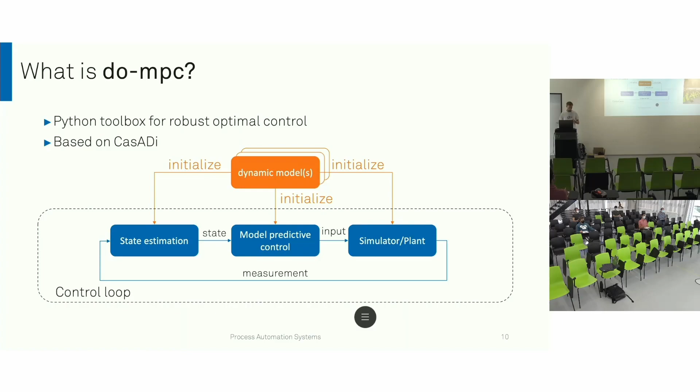Let's see on this slide quickly some of the features of these different blocks that Do-mpc is providing. So first of all, Do-mpc is able to deal with nonlinear ODEs or DAEs, which means ordinary differential equations and differential algebraic equations. These models are then, for example, used in the simulator, where we use essentially an integration tool, which is based on state-of-the-art integration, for example, with CVODES, but also other tools if you would like to do that.

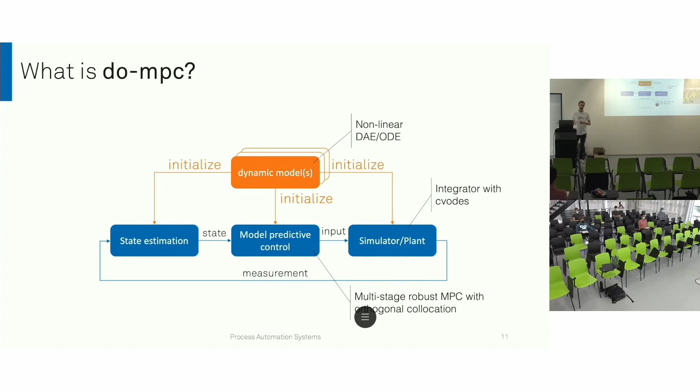Then the core block of Do-mpc is, of course, the MPC block, where we are providing an implementation of multi-stage robust MPC, where if we have a continuous time system, we use orthogonal collocation to do the time discretization. And finally, for state estimation, we provide an implementation of a moving horizon estimator, which is a very, very potent estimation tool for nonlinear systems and works very well in combination with MPC.

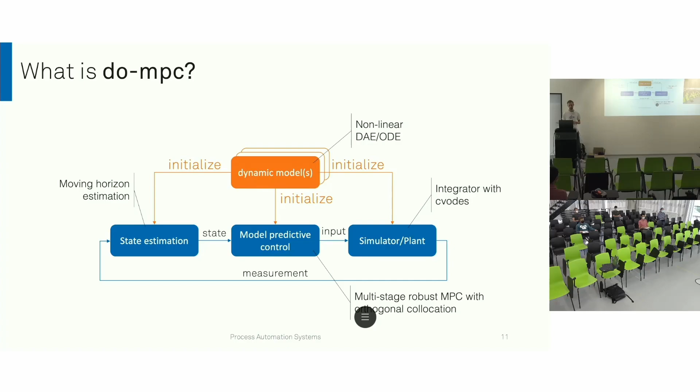One of the core features of Do-mpc that I want to emphasize, and which Sergio also talked about, is its modularity. This is really one of our core philosophies. What we mean by this is, even though on the previous slide I showed you a complete control loop where all the building blocks that you need to run this control loop are included, you can and you should in many cases only use some of these blocks.

So if you, for example, want to control a true system, you have a real plant, you will not need the simulator. This is clear, and it is very easy to do this with Do-mpc. In that case, you only use a dynamic model, you initialize your model predictive controller, and then that's essentially it. Unless you also need a state estimator, then you will probably also need that block.

And similarly, if you are not interested in controlling your system, but you want to do some parameter estimation or some state estimation, just to get some additional information about your system, you will probably only need to initialize, for example, the moving horizon estimation block. And yeah, this means that our Do-mpc modules can be used in combination or they can be used independently. And this is also something we want to keep for the future, which is essential for our implementation.

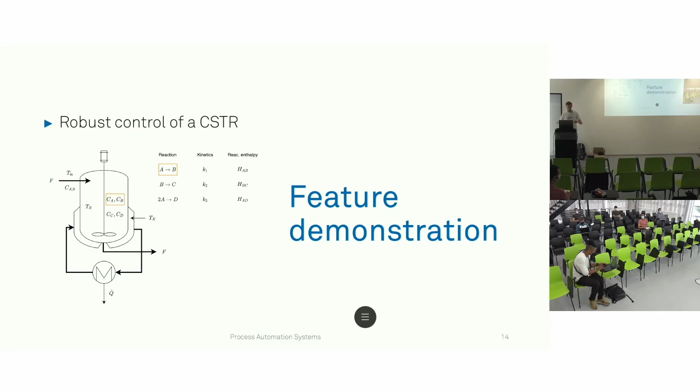The entire reaction is exothermic, so we need to cool this CSTR. And for this purpose, we have a jacket around the reactor in which some coolant medium is flowing. And as a second control input, we can use a heat exchanger to remove heat from this coolant. Yeah, that's essentially it. So after this quick introduction, let's look at the code.

Okay. Yeah, I believe this is large enough.

Good. Yeah, I'm doing all of this in a Jupyter notebook. In general, you will probably use Do-mpc sometimes in a Jupyter notebook, but sometimes not. But for the purpose of this illustration, it helps to do it in a Jupyter notebook. Here at the beginning, I'm doing nothing particular, just importing some packages, most importantly, Do-mpc, of course.

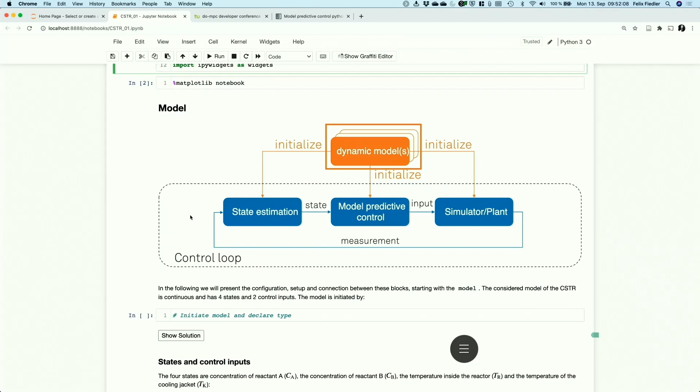And then I'm starting with the implementation itself. The first thing, as I said before, that we always want to implement is the model, because otherwise we cannot do anything. This is a model-based toolbox. So yeah, this is what we start with. And to implement the model, we simply create a new model object, which we obtain by typing do_mpc.model.Model. This is the model class, and this needs some parameters as well.

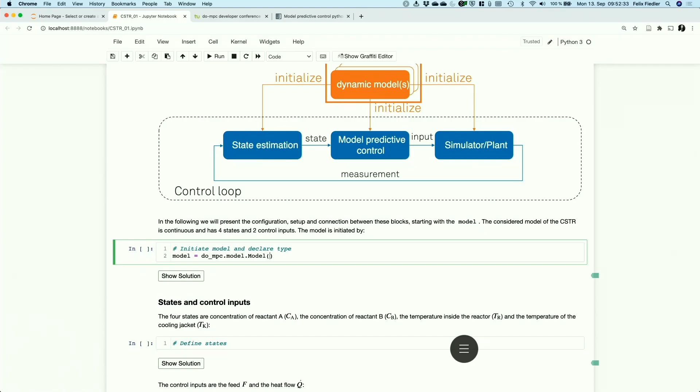Here, I want to already introduce you our contextual help in our documentation. Zoom even larger. Yes, thank you for the feedback.

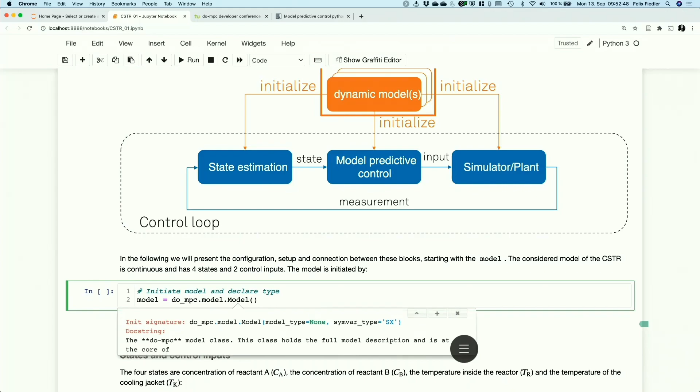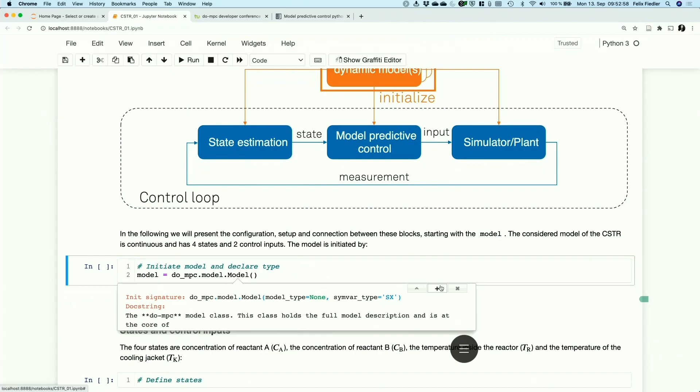Like this? Good. Yeah, here I want to introduce you to some contextual feedback. So if I'm pressing, for example, Shift-Tab, I see here what I need to provide to this function call in order to make it work. So the first argument is the model type. And yeah, now you can scroll through this, but sometimes this isn't beautifully rendered.

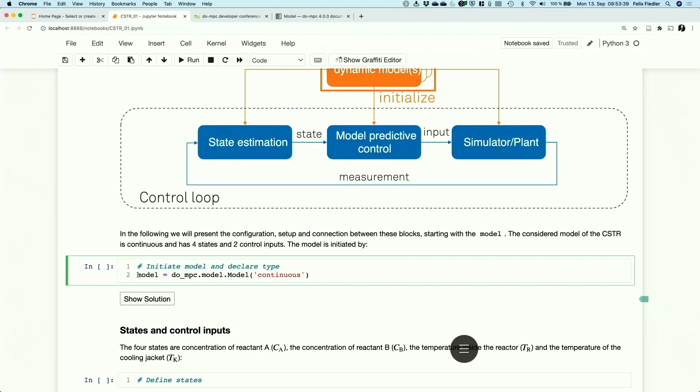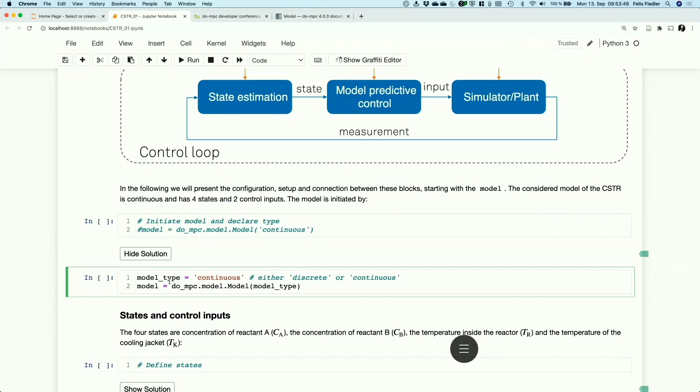Because I'm scared of making mistakes, I'm going to type some of the code here, but then I'm going to comment it and show instead the solution that I've previously prepared. Don't be surprised if I'm doing this. It just ensures that this code is actually working, because it's always easy to do small typing mistakes which completely ruin the code for you.

Yeah, after I have initiated the model class, which is now an ODE or DAE, I need to define the variables to the model. And this is done by using the model.set_variable command. By the way, if you're ever confused about some of the structure, how you should set up this model, I would like to refer you to some of the examples that we are providing, and also here is some instruction on how to do this in a very general way, I would say.

Yeah, model set variable, and then the first thing I want to introduce is a state. So states are called _x for us. You can of course see that in the documentation. Then the next thing I need to provide is a variable name, which is user defined. So for example, one of the states that I'm having is the concentration of component A, so CA. And then that's essentially it. And I assign this to a variable. So CA is equal to model.set_variable state with the name CA.

Let's have a look at the solution that I have prepared. Yeah, so essentially the same thing. Except that I've of course introduced the other states as well.

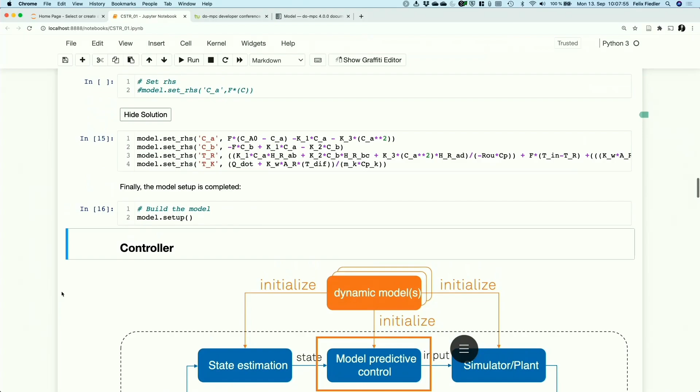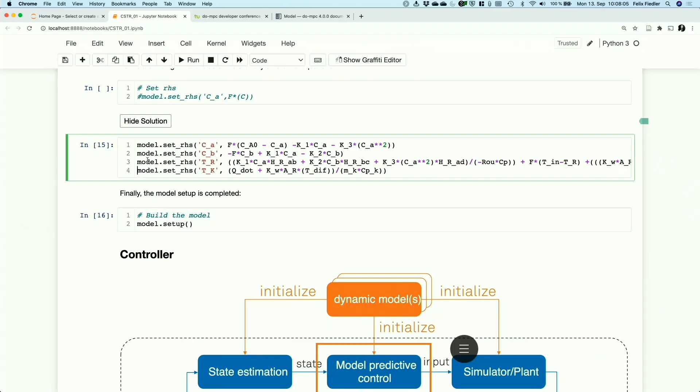Indeed, you will get an error if you forgot to set the right-hand side for a state. Do-mpc will make you aware which right-hand side you have forgotten. I cannot really demonstrate it now because I have forgotten none of them. But if I were to forget one of them, the setup command does this among some other sanity checks. So typically, you can expect some very verbose error messages from Do-mpc if you're doing something wrong, which at least helps us a lot to fix these errors quite easily.

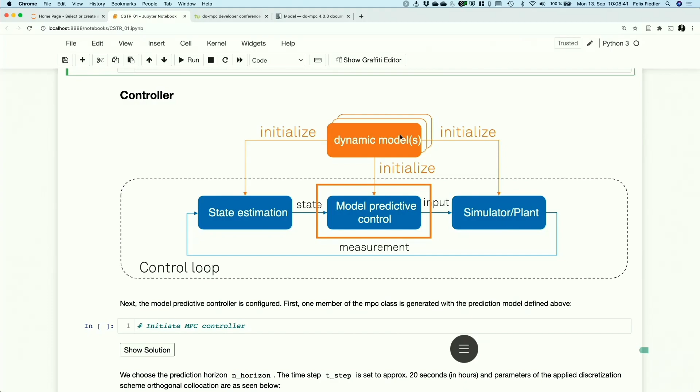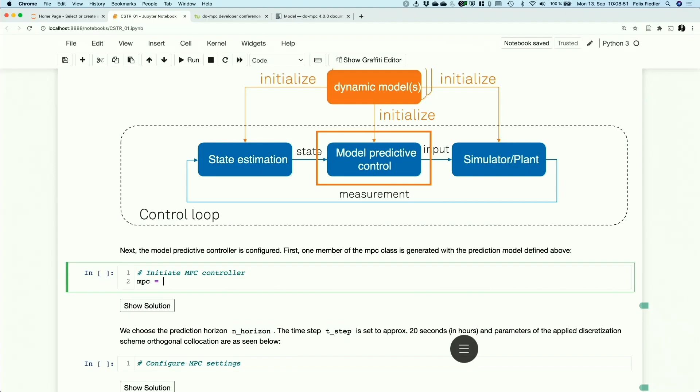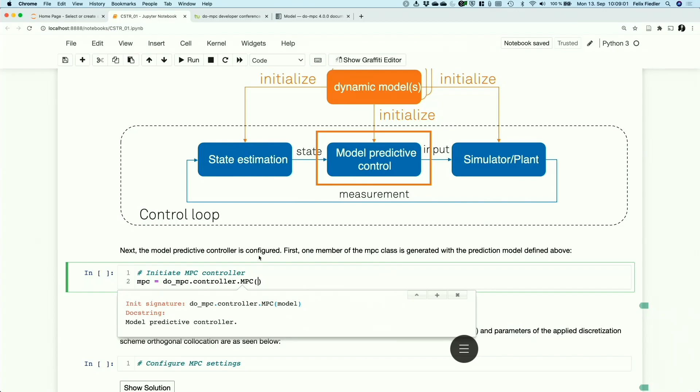Yeah, this brings us to the next step, implementing the controller. As we have seen in the figure on the slides, we initialize blocks in Do-mpc by passing a dynamical model. The dynamical model is now implemented, so now we can pass this to the MPC block and configure it. And this works almost exactly as expected, I hope. So we type mpc, that's the name of our class instance, is equal to dompc.controller.MPC. And this wants exactly that, just a model class. So we type model, because that's the name of our model class, and we are able to initialize this controller.

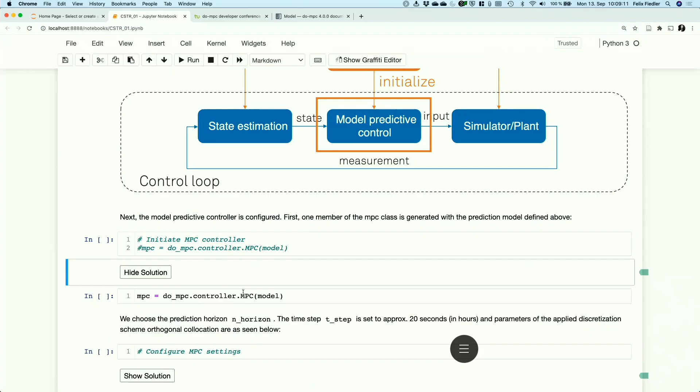The next step is to configure some MPC settings. There are multiple settings that you can set. You don't always have to set all of them because there are default values for most of the settings. All of these settings are set by typing mpc.set_param. And here you see in the help that you should pass keyword arguments to this command, and the keyword arguments can be found here in the help. So here we have set_param, and you see that there are quite a lot of parameters that you can pass.

One of them is, for example, the length of the horizon, which is obviously super important for the configuration. So we're going to set that. It just works like this: n_horizon is equal to 20. And we can set other parameters, like, for example, the time step, and a lot of different things.

What you will also see often in our implementations is that we are configuring some dictionary. And this dictionary can have keyword arguments and values for all of these parameters. So n_horizon is equal to 20, t_step is equal to 0.005. And then we just call set_param once with this dictionary, which sometimes makes the code a bit more elegant, but this is really just your preference. Note that if you want to pass a dictionary here, you need to use the splat operator, which is a double asterisk. And all this does is unwrap this dictionary into keyword argument pairs, which are then passed to the function.

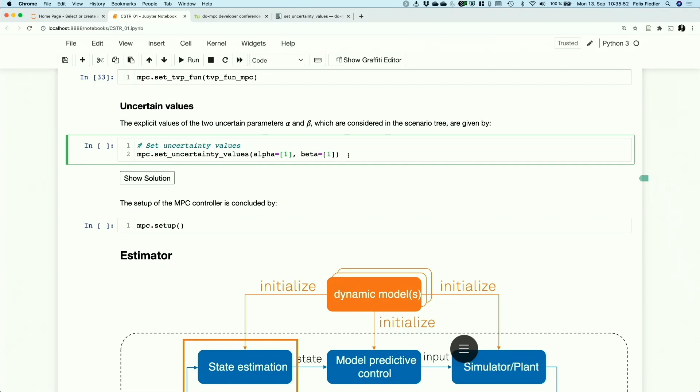I believe that's how the command looks like. Yeah, set uncertainty values. And then what this command would like to have is keyword arguments. So the keyword arguments is just going to be alpha, and the value that we are passing is 1. And beta, and the value that we are passing is 1. This has to be a list or an array, but yeah, we will see later why this is the case. Okay, so uncomment and show solution.

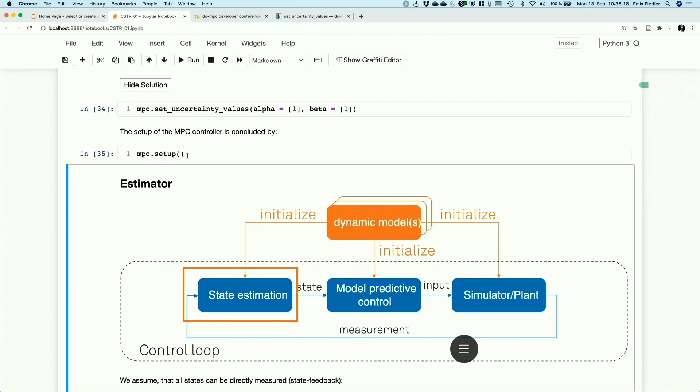And that's it. The MPC controller is fully configured, and all that remains to do is to call mpc.setup. So this is where the MPC controller is now creating the optimization problem in the background. So depending on what you have been configuring, this might also take a couple of seconds. So if you have very large problems, this is where you will wait a couple of seconds until it's finished.

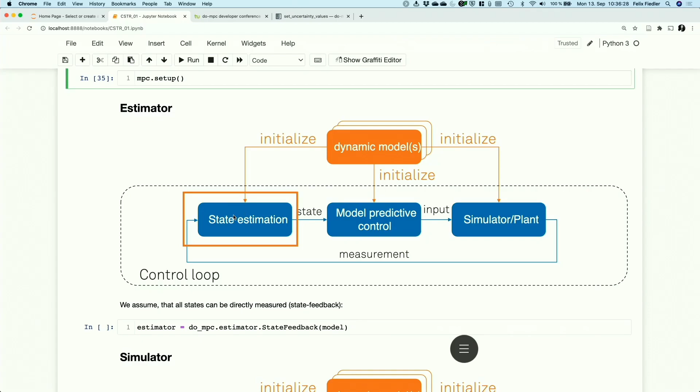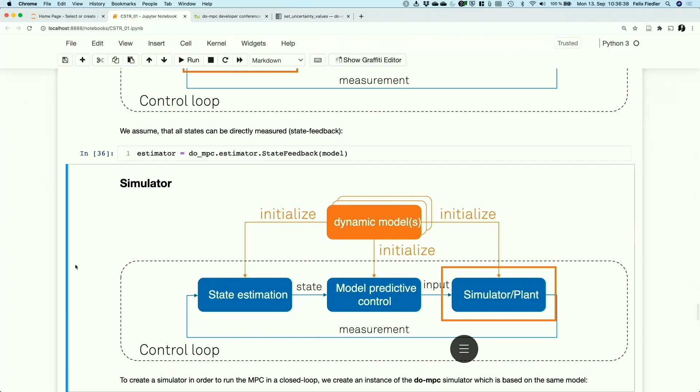Yeah, now we can configure the next block, which in this particular case is the state estimation block. It's a trivial block in our example because we have state feedback. So I'm not going to go into detail about this configuration here. And we immediately go to the last block, which is the simulator, because this is a coding example. We are not having a real plant here with us today. We need a simulator, of course.

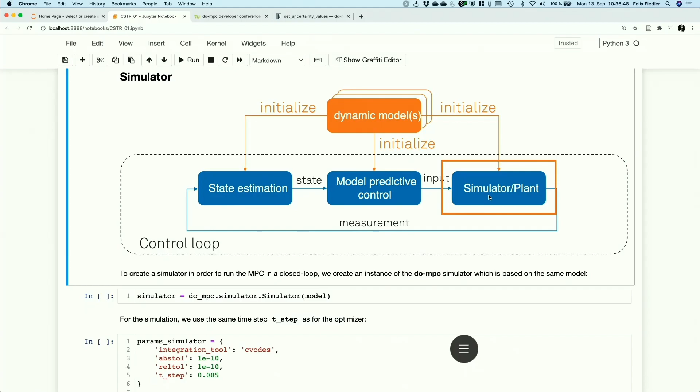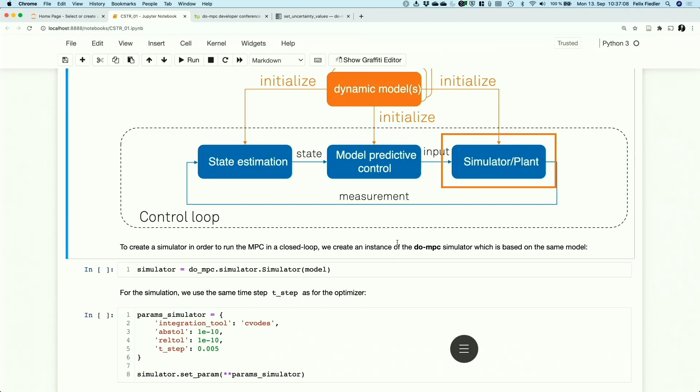And the simulator is basically just using some model and integrating this model over time. In the most general case, this could be a more complex model of the same system, of course. So a high fidelity model, for example, one that is maybe too complex to use for the MPC controller itself. In this case, we use the same model for the simulator as for the MPC controller. But again, this is why we have here multiple blocks behind each other to emphasize that it doesn't have to be the same.

The simulator is configured in a very similar way as the MPC controller. So we initialize it by passing model, which we have previously configured too. And if you could have a more detailed model, you would just have to put their model details, or exactly, whatever variable you used for the detail. Model 02 or something. And then you could do the MPC with the simple model and the simulation with the more complex model, which is a usual case. Absolutely, exactly. So in our case, we use the same model. But in the general case, you could or would use different models, of course.

Then there are some parameters that we are setting. You don't need to set all of those. All of them also have some default values, of course. Most importantly, you will need to choose the time step, which in the most general case is going to be the same as the time step for the MPC controller, but it doesn't have to be.

Then the simulator also needs to be aware of how to handle the uncertain parameters and the time varying parameters that we have introduced in the model. And for the simulator, of course, the uncertain parameters are not uncertain. They are just parameters, which might change over time, of course, but they are fixed values. So we are having a slightly easier implementation here.

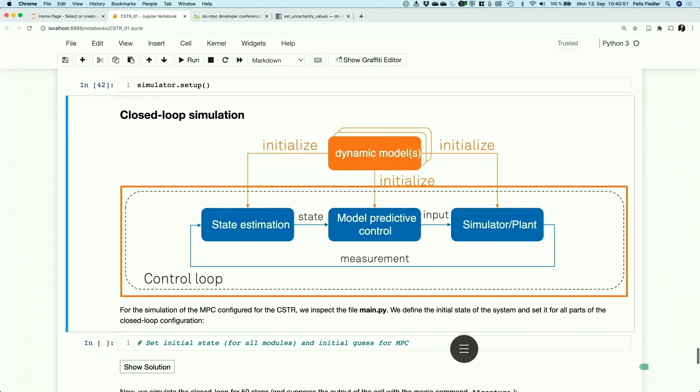We have a question, yeah? Why did you not have to set the value for CB set? Yeah, very good question. So the question was, why did I not change the value for CB set, which is also a time varying parameter, which is absolutely true. The answer to that is that it already has a default value. When we created this TVP struct by calling simulator.get_tvp_template, we are setting default values for all of these time varying parameters. It's always going to be 0, okay?

And because the set point of the concentration of component B is not affecting the model itself, it's only affecting the controller, we can absolutely neglect it. It's having no influence whatsoever on the integration of the model.

So the purpose of the simulator is basically we don't have the real plant, we just simulate the plant. So my question is, could we use some other software to simulate it, for example, like Aspen, because sometimes things can become really complex. So let me repeat the question. The question was, the purpose of the simulator is to simulate the true plant, which is correct. And then the question was, could we use some other software to simulate the plant if we don't have a real plant, like Aspen, for example? And the answer is yes.

So Do-mpc returns you some input in Python. And there are multiple ways to get this into another software. I don't know exactly how you would interface it with Aspen, but for example, one of the projects that we are working on today or during the next 2 days is to improve our OPC implementation. So I'm not sure if Aspen can actually access OPC data from an OPC server, or if there's any kind of interface between Aspen and Python. There are also, of course, hacky ways to transfer this.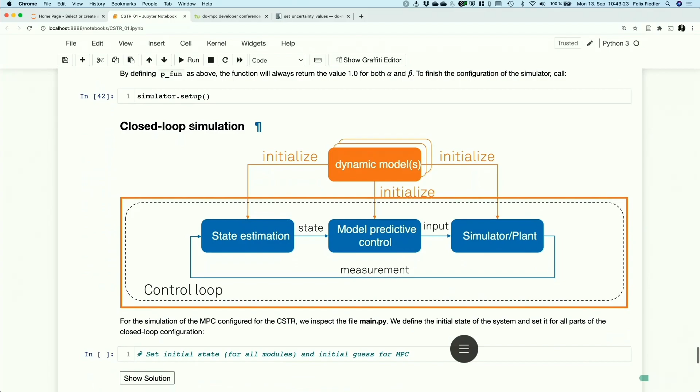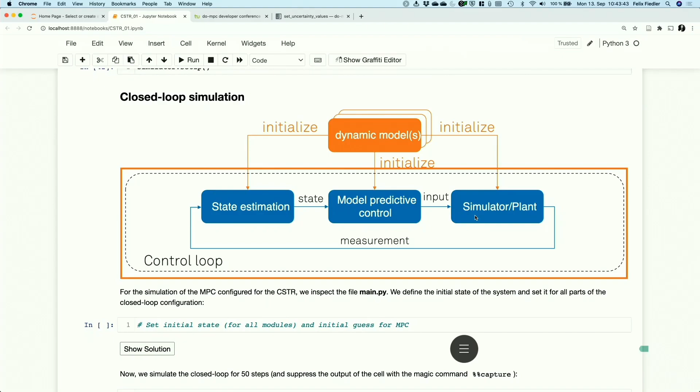Okay, then we continue with the last part of this notebook, which is the closed loop simulation. So now we want to run these 3 blocks here in a loop. So we want to have the MPC controller compute an input. We want the simulator to simulate the plant for this input. And then we want our trivial state estimation block to get back the state for the controller to repeat the cycle.

And to do this, the first thing I always like to do is to set the initial condition for all of the blocks. Here we're going to do a trivial example where all of the blocks have the same initial condition for the states. Of course, in the general case, you might want to have a different initial state for the simulator and for the estimator, and hope that your estimator recovers the true state of the system. You will see how this works, but we are not doing it here.

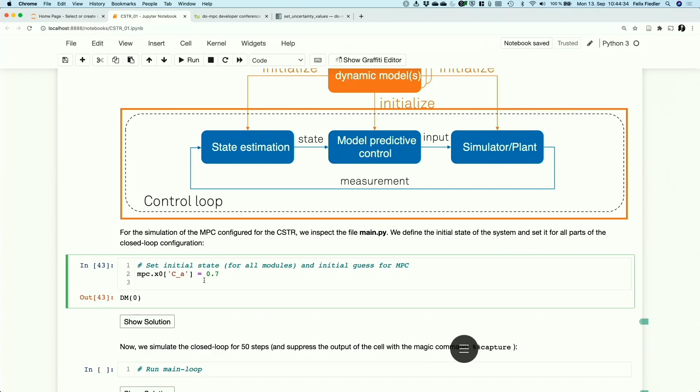So the way it works is you type mpc.x0. And this is, again, something that you can index. So here you just type the name of the variable you want to set the initial state for. So for example, CA. And we can see what the current initial state is. It's just 0. So now I could set some value here. I forgot what the true value is. I will just look at the solution in a second.

And we could do this for all of the states of the MPC controller. And if we are super lazy, we are then typing x0 = mpc.x0 to recover that initial state, which is now fully set. And then we are just setting the initial state for all of the other blocks like this, okay?

So this is one of the preferred ways of setting the initial state. But you could use just any different initial state for any of the models? Yes, absolutely. So now, for example, for the simulator, I could have CA equal to 0.6, for example. This definitely works. And in many tests you should also do that, of course, to have a more realistic implementation or implement a realistic test.

Let's have a look at the solution. So essentially what I've been doing, just with some different values. The only thing that I have not been talking about is this mpc.set_initial_guess. This is essentially just taking what you pass to the MPC controller as the initial values and assumes that these values are going to be the same for all of the steps in the prediction horizon. So we are setting the initial guess for the optimizer.

It's often recommended to set some initial guess which is not all zeros, because, for example, in our example here, we would actually have a failure if our initial guess would be all zero for all of the states, because if you look again at the ODEs, here it wouldn't be a problem, but here we are dividing by one of the states. So if there wouldn't be an additive term here, having an initial value of 0 would result in NaNs essentially. So the optimizer couldn't find a solution. So always use this set initial guess method. It really helps a lot.

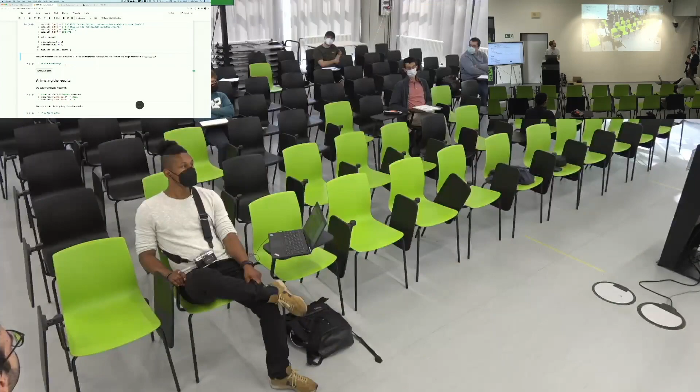Yeah, we have another question. How do you initialize the next step when you're running the MPC, since there's one additional point you take? Maybe it becomes clear when I'm showing the main loop in a second. No, but he means for the initial guess in the next step. If you really take the shifted solution, there is one step for which you don't have the solution. So how do you deal with this problem, or do you?

Yeah, we do. Sergio repeated the question. We do the naive approach. We just use exactly the same solution. This seems a bit illogical, but in practice it works surprisingly well. It returns very, very good results. It certainly accelerates the process a lot.

We have tested at some point shifting, and maybe keeping a constant value at step n+1 or something. It doesn't help a lot. So yeah, we are just using the naive approach. I think sometimes what you win with having the shifted solution, you lose because you are choosing a bad last point, and at least you know that the previous one that you solved was feasible. Yeah, that's good. That's exactly true.

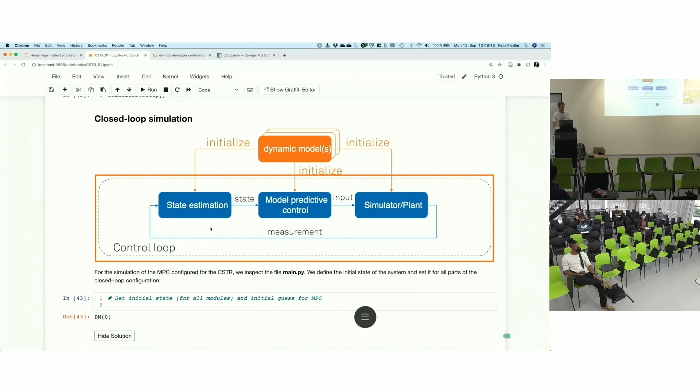Yeah, and then the next point is to actually run the main loop. So now we have set the initial state for this main loop. Now we need to run it. This is quite simple. It's just a loop. So it works like this. We have a loop over some number of simulation steps, here in my case 50.

And in this loop, all we are doing is we are first computing an input to our system with the mpc.make_step command, which takes the current state of the system. Then we are computing the next measurement of the system with the simulator.make_step command, which takes the input. And then finally, we are obtaining the state again, which is computed with the estimator.make_step command, which

takes the current measurement. Again, in this particular example, the estimator doesn't really do anything. It's just forwarding whatever we got as a measurement here. But in the general case, this is how the loop looks, if the estimator actually does something of importance. And you can see here the picture that Felix was showing. This is the beauty of it: once you have done all the definitions, that's the 3 blocks you have, and you just have to iterate between them.

Yeah, exactly. If you would like to have some parallel simulations of other models for monitoring, you could just simulate at the same time 3 different models of different accuracies and do comparisons about the states. So that's basically the idea of modularity that you see there. Yeah, absolutely. So let's run the loop and hope I didn't forget any of the code blocks.

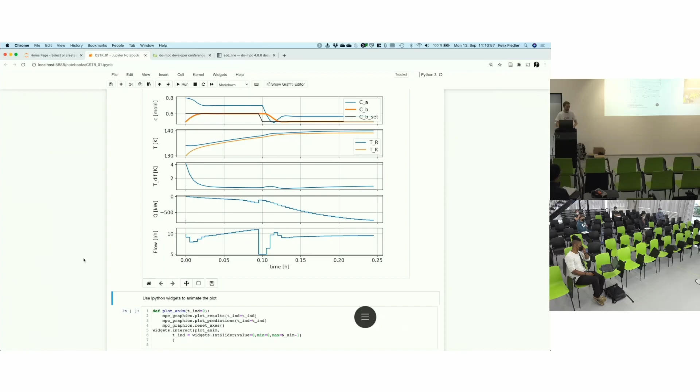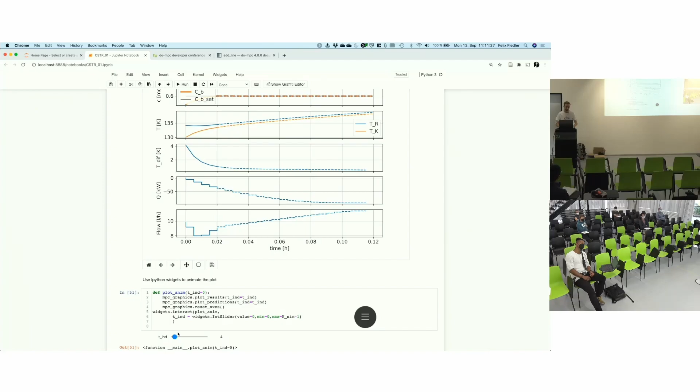Okay. And here, for example, I've been using some IPython widgets or Jupyter Notebook widgets where I am, let me just execute this, then you should see it much better, where I'm introducing a slider, and I can slide over all of the time steps of my prediction horizon. And now, if I'm sliding here, I see what my MPC controller is seeing at each of these time steps. So this is this dashed line here. This is the prediction of my MPC controller, and then the solid line is the actual performance of my system.

And what I want to emphasize here is, for example, the use of the time-varying parameters, because we have implemented them in such a way that they are always constant, so always 0.6. Even here in the prediction beyond this point 0.1, we are changing the time-varying parameter for the set point. But we are changing them in a maybe not super smart way, because, sorry that I have to zoom out just once more, but it makes it easier to see. So if I'm going here to the point 0.1, you see that, zack, the set point has changed to the new value. And now the set point is overall always at 0.5 for the component CB.

But your prediction was not taking that change into account. Absolutely not. This models a realistic situation where you don't have the information that a change is going to happen. Yeah. But sometimes you do have this information. Absolutely. Here we are kind of mimicking the scenario where the operator walks into the room and decides to change the set point. And nobody knew this in advance, and then it's just happening. But of course, in many cases, you will know it, and then we can also take this into consideration. And this is, in fact, what I want to show you next. So yeah, we are done with this example.

So in this very next example, which is much faster to show to you, it's essentially the same code. The only difference is now that for the time-varying parameters of the controller, we are considering the fact that we will know in advance when the set point is changing, okay? And there are multiple ways of implementing this. I'm showing you here one implementation where the time-varying parameter function that I'm now creating actually uses this input tnow. And from this input tnow, it's computing a switching index. So it basically denotes the step of the prediction horizon where the switch is going to happen. And of course, the switching index moves closer to you as you go forward in time, which hopefully makes sense.

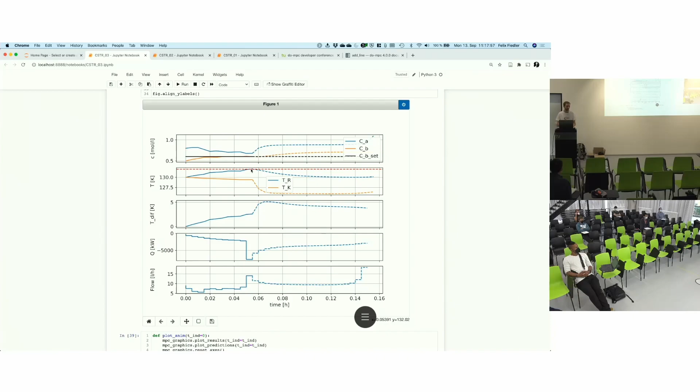But if we violate this constraint, our controller experiences this very high penalty, and therefore does everything to go below the constraint again. This impacts our control performance. We now focus on not violating the constraint anymore, and deviate from the set point that we wanted to reach. We see this here if I go a few steps further. First of all, we have this high peak, both in the states and in the inputs, to reduce the temperature. As a consequence, we are both predicting and realizing a trajectory for our CB component which is far off from our set point.

So this is really not perfect behavior, and it hopefully illustrates that we need to do something to fix this problem with robustness. And this is the next step: robust multi-stage MPC. Again, the same implementation as before. The only thing that is different is that we have set up our MPC controller with the setting n-robust equal to 1. Previously, we have not chosen n-robust, which means the default value of 0 was chosen.

The second thing we are changing is that we need to let our MPC controller know of some of the scenarios of the uncertainty values. Yes, Benjamin? Why do we have this n-robust? Why do we have different values? What does it mean? Let me quickly introduce the concept of the uncertainty values, and then hopefully it becomes a bit clearer, okay?

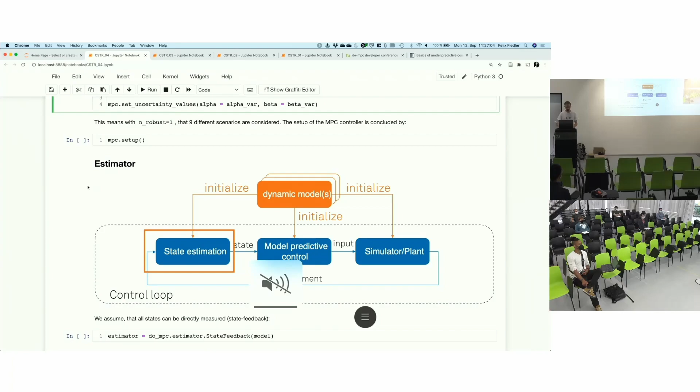So now we have set these values, and we need to use the robust multi-stage MPC controller. We don't need to change anything at this point. We have set up everything that we need. So let me just run this code. The only problem with robust multi-stage MPC is that it is slightly slower than the previous implementations because we have so many more optimization variables. But especially for this example, it's still reasonably fast, much faster than the sampling time of the system. And here we go. We have the results already.

And you notice that things look a lot different than before. Because now in the prediction, we are not showing one prediction line, we are showing multiples. In fact, we are showing 9 here because we have 9 scenarios. This is the first visible difference between the previous implementation and this implementation. And you will see that this tree of different scenarios is always going to be there at each of the steps. It's just going to change depending on what has happened. But now it is interesting to see what the effect of this robust approach is.

And I think we see it most clearly in the trajectory of TR, the reactor temperature. This was the one that was previously problematic. We were very close to the constraint, and occasionally some parameter would drive us beyond the constraint. We would violate the constraint. But now, because we are expecting that there could be some parameter realization that would drive us much closer to the constraint than in most of the other scenarios, we are actually staying far off from the constraint. So there's some sort of safety margin that is now implicitly calculated.

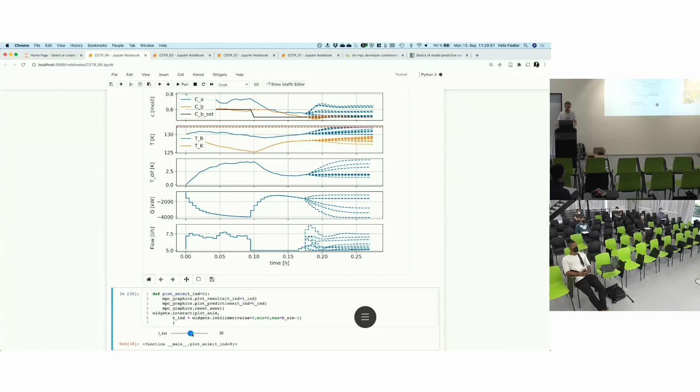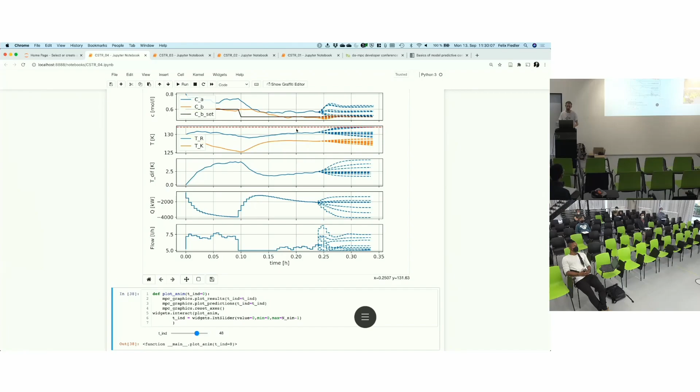And again, after the set point change, we are staying off of this constraint, and we see some of the scenarios actually predict that we would go very close to the constraint. And because of these scenarios, we are again keeping our safety distance from this constraint. And because there's no lower bound here anywhere close, of course, we are completely ignoring the lower bound. So all of the emphasis is now put on this upper bound, which is here the most critical one to satisfy.

And this is a very nice or unique feature of Do-mpc: for any MPC that you implement, you can do robust NMPC, multi-stage NMPC, which is pretty difficult to implement. You can do it just by changing one number, basically. Put a robust horizon equal to 1, and you have at least a try at robust NMPC. Absolutely, yeah. Then this is it. The feature demonstration is over.

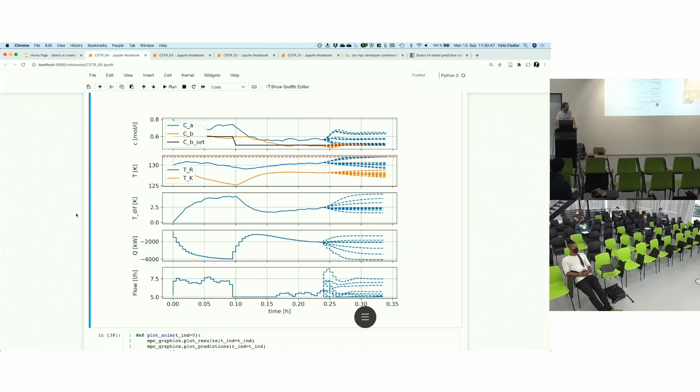Are there any final questions regarding the feature demonstration? Benjamin, could you monitor the chat for me for a second? Is there anything? Any further questions from the audience?

How does the normal or the default plot work when you have different variables, such as a vector together, or do you get one for each? If you have a vector with multiple components, the default plot plots them all in the same subplot, which is often quite useful. But in general, the default plot for us is really meant to get a first impression of the results.

So if you don't like the representation of the default plot, just go for the custom plot. But the idea of the default plot is if you have a vector, it's plotting all of the elements of the vector into the same subplot. I again forgot to repeat the question, but I think it became quite obvious from my answer.

Okay. Maybe we can have a look at the agenda. One second, we have more questions, sorry. Yes. Different models for different scenarios? No, not natively. You can, of course, kind of fake it by implementing your scenarios as some sort of binary on-off thingy, and then in one scenario you are multiplying the right-hand side of model 1 with 1 and the right-hand side of models 2, 3, 4, 5 with zeros. So in a slightly hacky way, I would say it works.